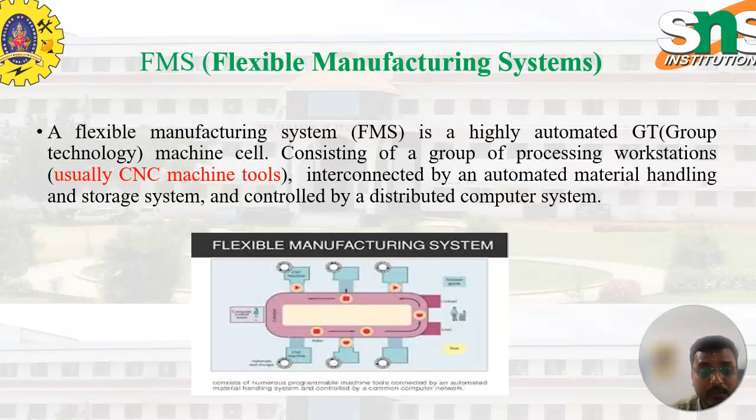Group technology is nothing but the grouping of similar parts or machining operations together to make the product. So here we have many types of advantages and many types of layouts. Some of the flexibilities in manufacturing are machine flexibility, production flexibility, mix flexibility and product flexibility.

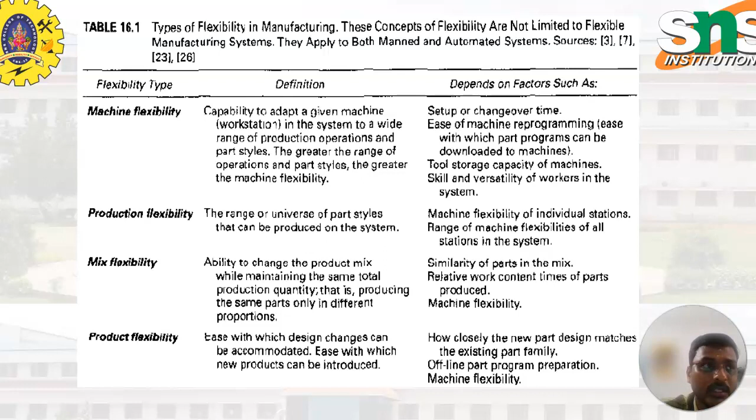Machine flexibility is the capability to adapt a given machine workstation in the system to a wide range of production operations. So we can connect n number of machines in a single layout and give the component to work on that particular machine. Production flexibility is the range or number of part styles that can be produced on the system. They can do one operation and directly move to the next operation, then mix flexibility. These are some of the advantages.

Then routing flexibility, the capacity to produce parts through alternative workstation sequences in response to equipment breakdowns or tool failures. In case any machine breaks down or a tool fails, we can directly move that work part to another machine to complete the process.

Volume flexibility is the ability to economically produce parts in high and low total quantities of production given the fixed investment in the system. Expansion flexibility is the ease with which the system can be expanded to increase total production quantities. FMS can be in two kinds of operations: processing operations and assembly operations.

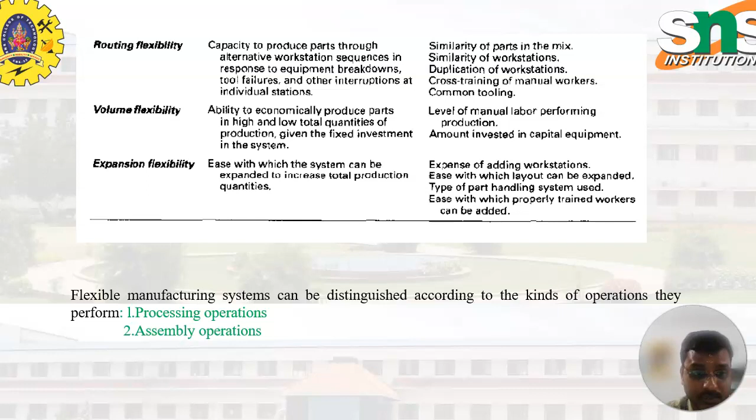Processing operations transform the work material from one state to another, moving towards the final desired part or product. It adds value by changing the geometry, properties or appearance of the starting materials. Processing means the main operations that give the shapes or properties to materials.

Assembly operations come after processing; after completing the product, we make an assembly. It involves joining two or more components to create a new entity, called an assembly or subassembly. Permanent joining processes include welding, brazing, soldering, adhesive bonding, rivets, press fitting, and expansion fits.

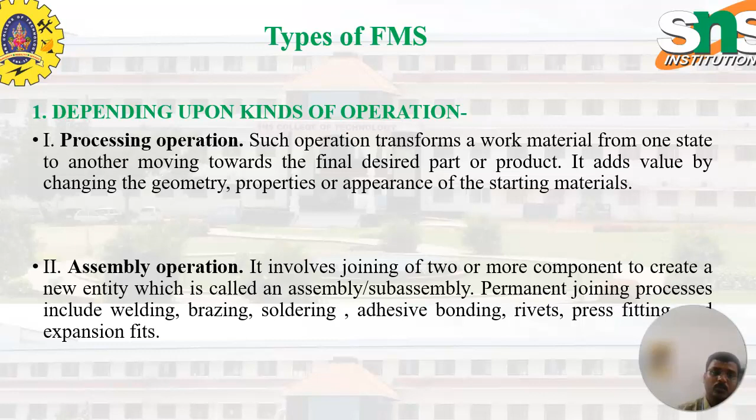These two are the main types in FMS. The processing operations and the assembly operations help make the product easily and with quality. Regarding the types of FMS, depending upon the number of machines, we have three types: the single machine cell, SMC; the flexible manufacturing cell, FMC; and the last one, FMS.

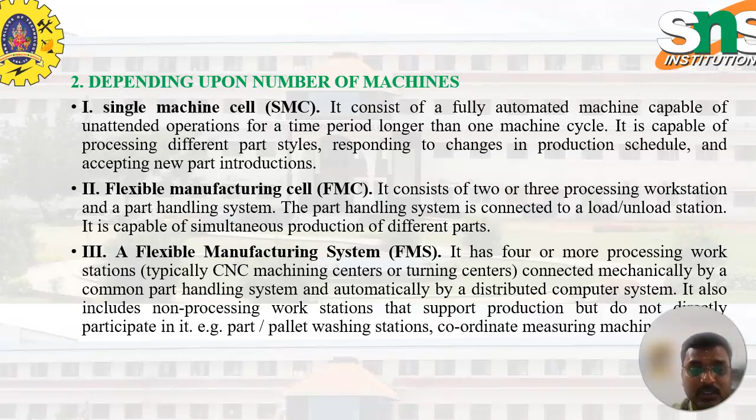A single machine cell consists of a fully automated machine capable of unattended operation for a time period longer than one machine cycle. It is capable of processing different part styles. The FMC consists of two or three processing workstations and a part handling system, so processing is done continuously in a layout. FMS has four or more processing workstations, interconnected with CNC machining centers and turning centers to complete the process.

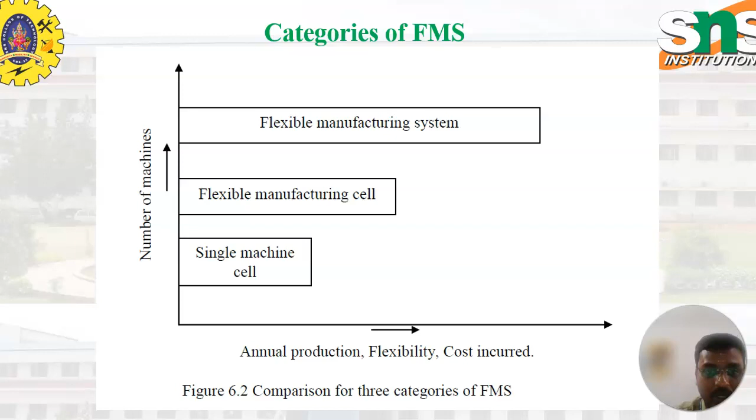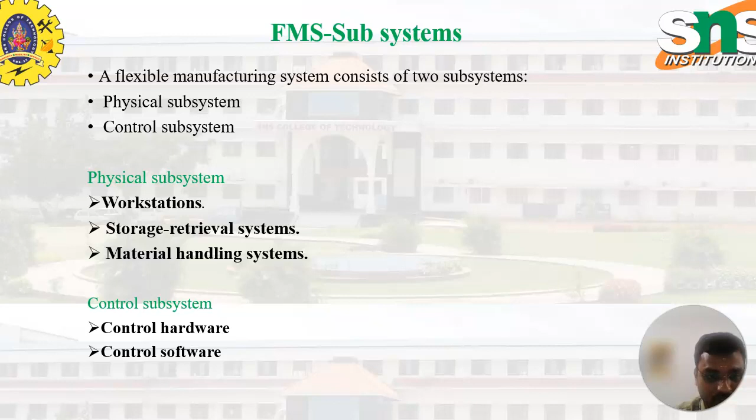These are the categories of FMS: single machine cell, flexible manufacturing cell, and FMS. Depending upon the level of flexibility, we have two types: dedicated FMS and random order FMS. A flexible manufacturing system has two subsystems: the physical subsystem and the control subsystem. The physical subsystem is the workstations, storage and retrieval system, and material handling system. The control subsystem is the control hardware and software. This is the flexible manufacturing system introduction.